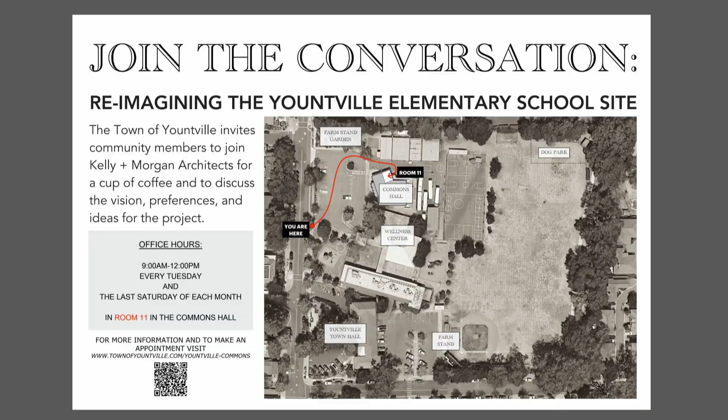So we just talked about joining the conversation. All of you are aware of how widespread the need is, and we've heard from a ton of residents about the number of jobs in Yountville. We've talked about the mismatch of housing stock, and the multifamily zoning, even though it's a little skewed with things like the Veterans Home. Yountville looks good on paper, but outside of Hopper Creek and a few other smaller condo projects, it's actually entirely a community of single-family homes.

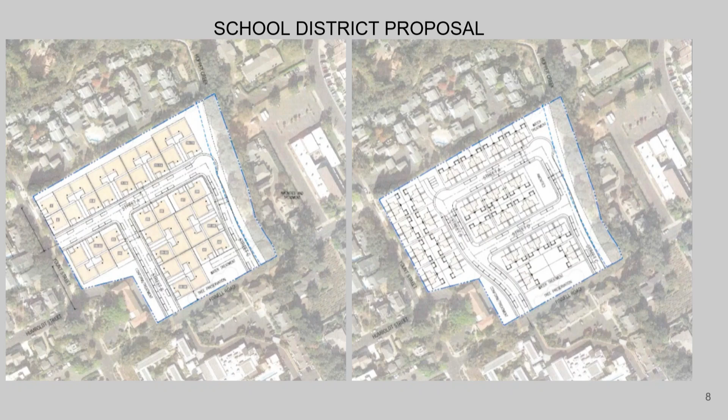We're going to get into this, because the single-family home proposal from the school district, which was the basis for the purchase price, is actually not going to solve the RHNA numbers or create a center in the center of Yountville. It would have been great for a developer, but the highest and best use doesn't actually qualify for the town's general plan or the housing element for single family.

This is the center of town. It's a 5-minute walk to Ranch Market for a quart of milk. It's a very rare thing in towns, even from Calistoga all the way to American Canyon, certainly throughout California.

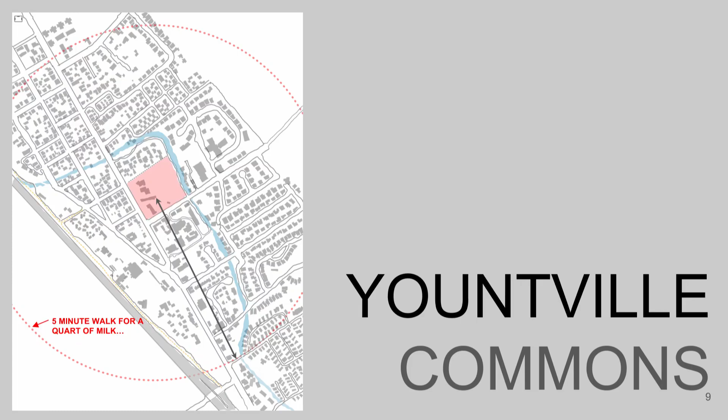Many successful things are already in place in Yountville. There are already established, approved policies in the current housing element, and that's in your staff report. The RHNA number, 72, is now fairly well advertised between very low and above moderate income.

This is supposed to be housing for people who work in Yountville and can't afford to live in Yountville, although many of them are commuting 30 minutes to an hour, usually alone in a car. We don't know if it's for all of them, but it's definitely enough for a high percentage who would rather live here than somewhere else.

We went through a lot of different visual things early on in the project.

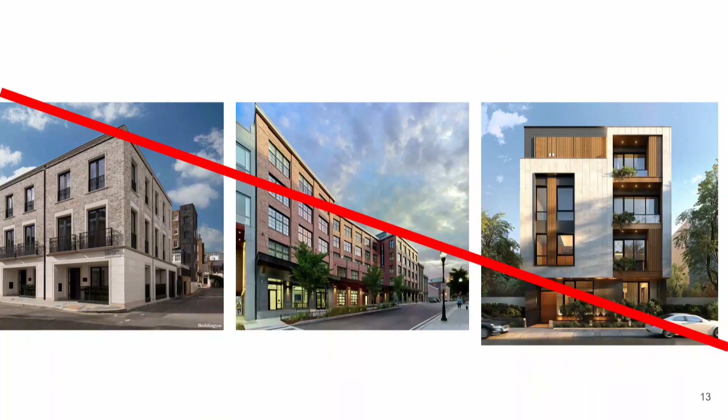These did not, even though they're handsome buildings—everybody's expecting at the center of Yountville more Yountville, and this would look very strange there. We've looked at Old Town densities, and at the other end of the spectrum, the trailer park, like Rancho.

And even though those are a wide range, we're going to have to do even more high density to preserve open space and parkland and still get some of the numbers that people are expecting. So what does that look like?

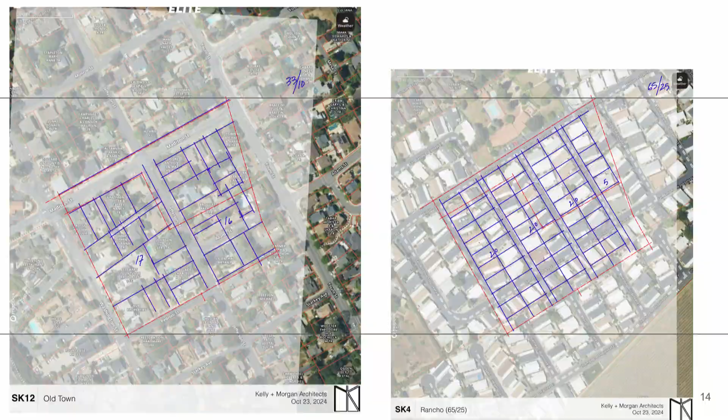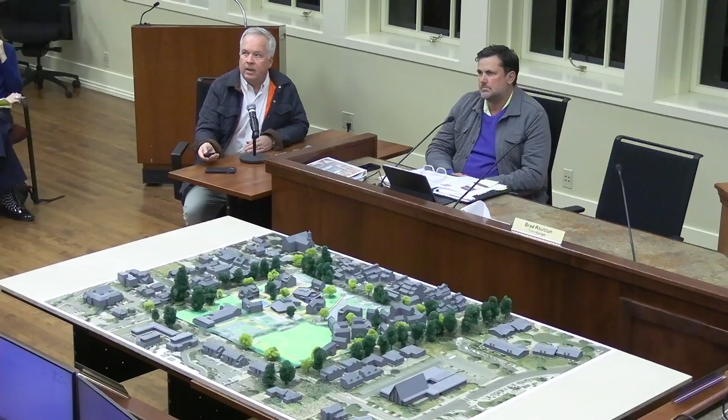We did not show you this last September. We did this actually as a result of that meeting because we needed a little more context of all the parks and recreational opportunities, because they can't all be provided on this site with all the other things being required. You're commissioners on the Parks and Rec Advisory Committee, so you don't need any explanations from me about what you have here, but this was a tool for us to go to the public and other people who ask, hey, how can you fit this?

We were saying the town of Yountville has a beautiful baseball field across the way. They have a beautiful museum. They actually have a beautiful community hall. There's a beautiful pickleball court. There's a beautiful playground. So this helped us both in listing it and graphically showing where the bike paths were, and especially the walking paths near the Hopper Creek, which is such a part of being a resident in Yountville.

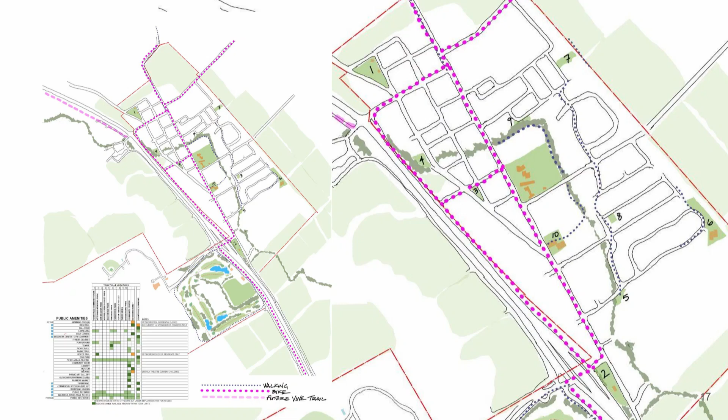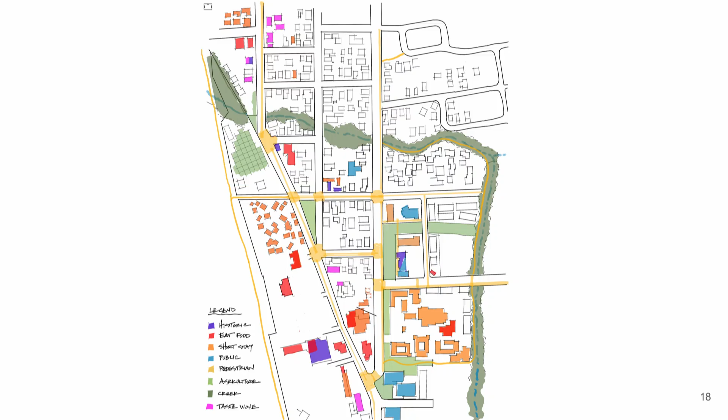And we also described how people, residents and visitors, could both come to this site and leave this site on foot or on bike, and understand where the commercial aspects of the site are, not just next to Bardessono, but all the way up Washington. This is a diagram, again, in your report that shows that. It's a way for us to tell other people when someone says, hey, there's nothing near my house, and we can show them in a larger context. Those are just tools that we're using.

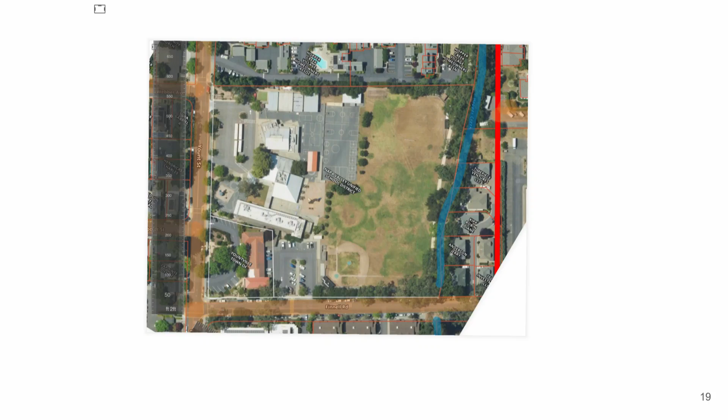So there's the site, and there's a lot of memory, of course. I think tonight we did this sketch that shows right now, without anything changing, there's a little over 3 acres of what I would call open space, recreational space, green lawns - things where it rains and it actually goes into dirt and not onto asphalt or roofs. And that's an important number, I think, for all of us to remember when someone will say, well, you took away this and you took away that and you added that.

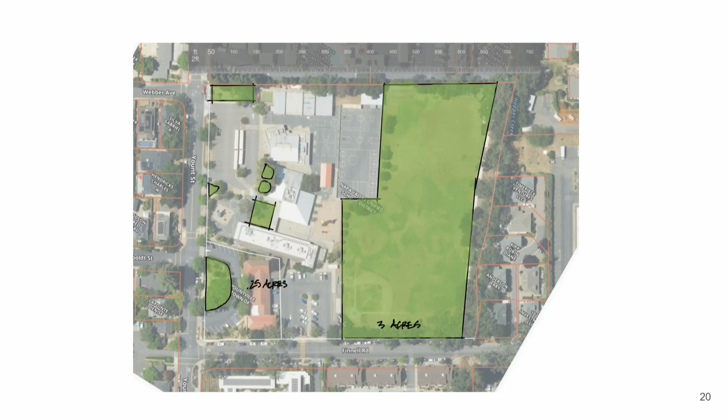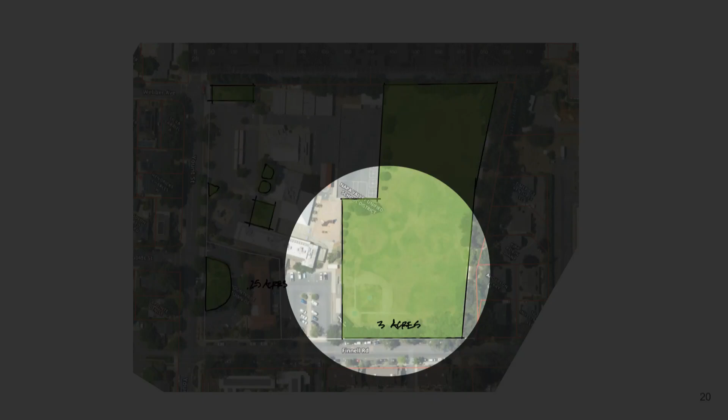And I think there's a baseline in terms of memory. One of the things that we found was, even though it's a recreational space, there's actually not that much connection to the public streets of Yountville the way it's laid out right now. It's perfectly laid out for a school, of course, but not for something that's more integrated into town. So we have to start cutting this up. It's bound by a condominium and by the actual Hopper Creek. So it's not like a city block, and we have to make it more like a city block in terms of parking and other things, and still think about the open spaces that we can build and retain.

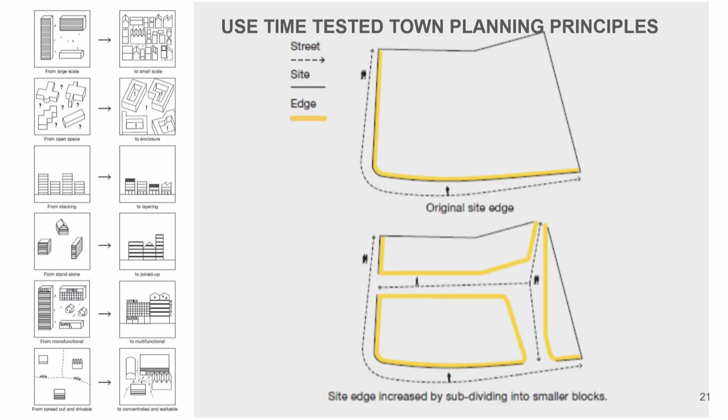And we'll get into that very quickly here. We went through with the town council, ZDRB, Measure S, all kinds of different ways. There's not some secret plan that got rolled out just in time. We went through and moved a lot of the open spaces, whether they're play fields or greens. We can look at things in a plan. There's nothing on this project that's changing the views down Finnell or down Yount Street in terms of the typical Yountville feeling of walking or biking or driving down streets with the tree cover and sun-dappled surfaces.

We ask at different meetings, Sunday dinners and different team meetings, what do you see, what do you not see? That is a question to you also tonight.

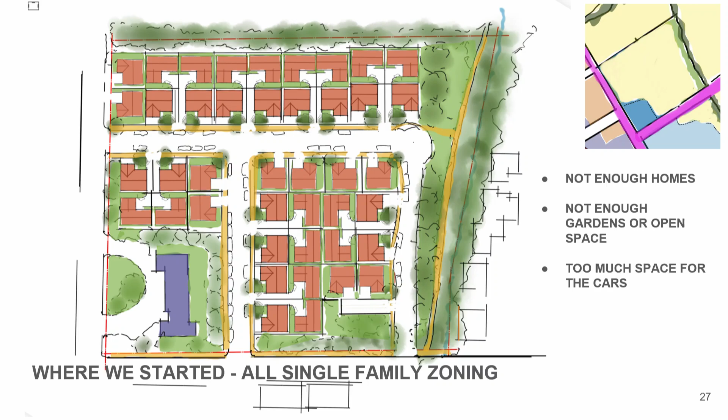This is, of course, where things started. It's technically what started it all. This is the 42 or 48 single-family homes. The reason we keep showing this is to remind the town what instead is happening, because we still have to do at least this number of units, if not more, plus the recreational space, plus the public buildings, plus all the other things. Just as a reminder, that's barely a half acre of open space compared to the three acres right there. So this was never viable, and it's important to keep reminding the town over and over again what was an option and what the town did to take a fork in the road.

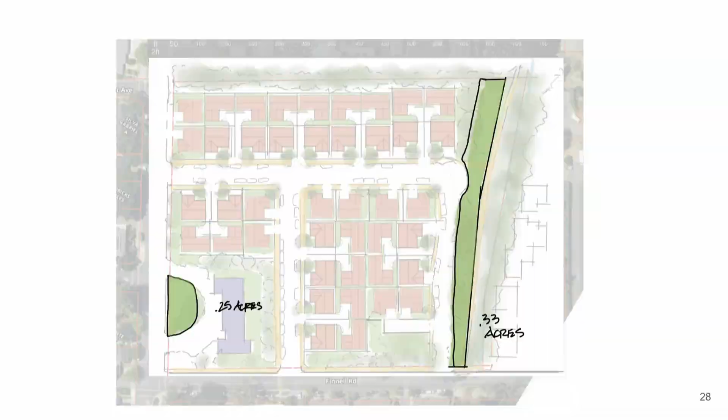And it's not just about housing, but about these open spaces and how they're integrated. So that's the scheme. You can see this scheme in this model right in front of you tonight. You're seeing a lot of open space and a lot of housing. This is at least the 75 or 72 that the RHNA number includes, plus the new fitness center.

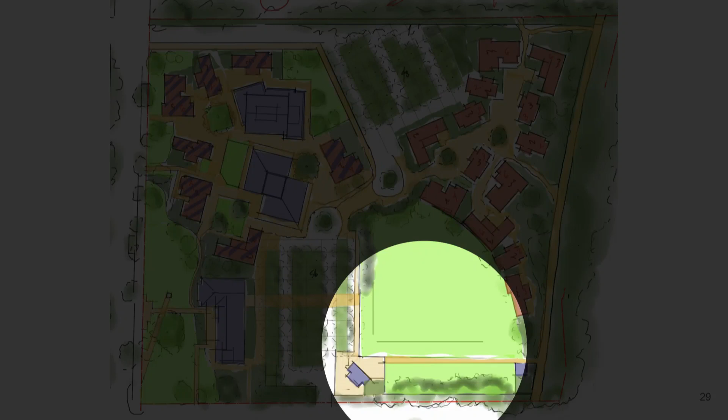The historic grammar school building that we're in, the Don and Sally Schmidt Hall, which was the old multi-purpose room for the school. There's the farm stand, and in these drawings we're also showing the garden up in the left-hand corner, and probably a relocated dog park along Finnell that's closer to the farm stand, closer to parking, and just as accessible for everybody. We've talked to a number of people who love the dog park but would like it closer to where they can park comfortably.

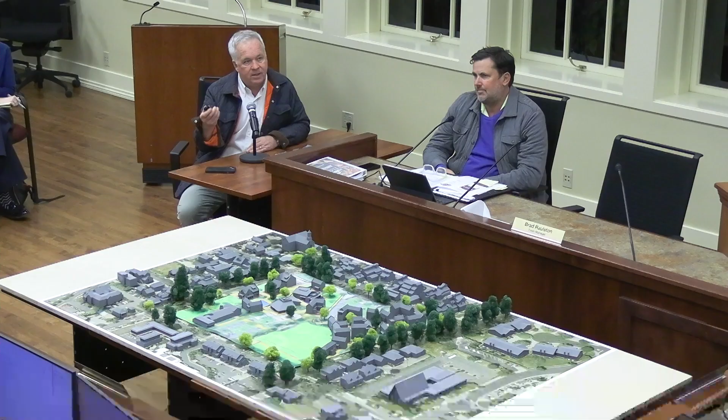And there it is, that's the other diagram, that's just over 3 acres. In this layout, that's the same amount of open space that currently sits in one big rectangle. The reason we drew this is now you're seeing all of the connections not just along Finnell, but all along Yount Street instead of parking in this scheme.

Can I? Walk. It's at the opposite end, but we organized this model so it's aligned to the axis of this building, so everybody can kind of find themselves.

We drew a blue swim workout pool, especially for Commissioner Rick. There's a lot of people who love the idea of pools, and I think it being connected to a fitness organization that could take care of it is a big idea. We show these things not just to sell them, but to make sure everyone understands how it's laid out. This is the community garden that Peter Jacobson just planted in the last few months.

This is, I can do this in two hands: this is the dog park along here on the south side of the current baseball field, the farm stand incorporated into an activity like that. But one of the biggest things for this scheme is all of the parking that's in front of the grammar school, in front of the town hall, in front of all of these former school buildings, is now behind.

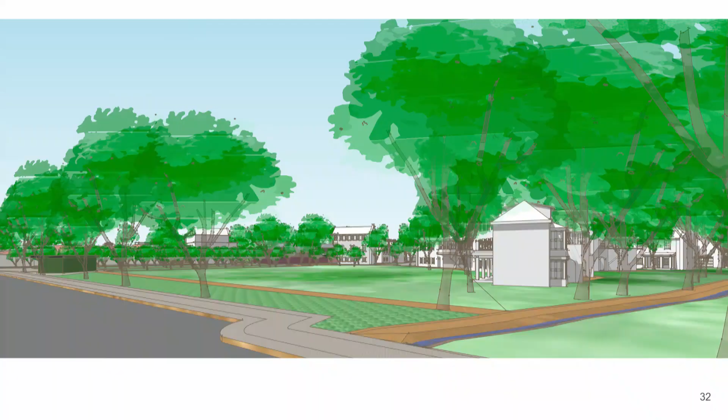So that's the model. You can see some of these street level or eye level schemes. That's the farm stand, of course, there on the left. And we're going to show tonight there is a phased program.

Many residents have talked to us about how it's important to leave more room. If you plan for success, you have to be able to say, hey, this is so successful, we need to be able to add another 20 or 30%. So we actually have a scheme that we'll show you that fits in that ball field section right there.

This is the second scheme. We're not going to build it out tonight just because of the time and the complication of taking one model off or one model on. But the point we're trying to make is that both schemes we're showing have the same acres. The 3 acres of open space is kind of our touchstone.

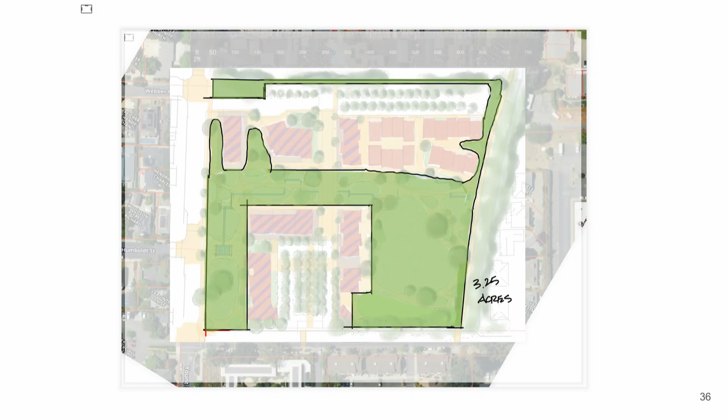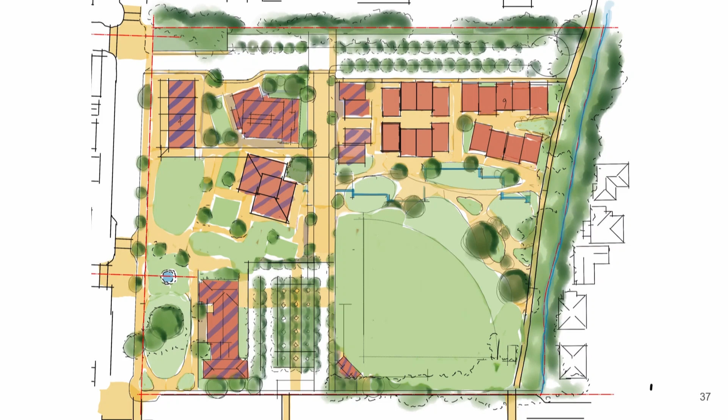And it can be organized in different ways. This is the one with the library still there. A lot of the alternatives we're bringing to the town council are a result of many meetings where everybody wants alternatives. They don't want just one solution that people are chasing. They want to have a lot of flexibility and adaptability around the school site, whether it's Parks and Rec, housing, or the other civic pieces.

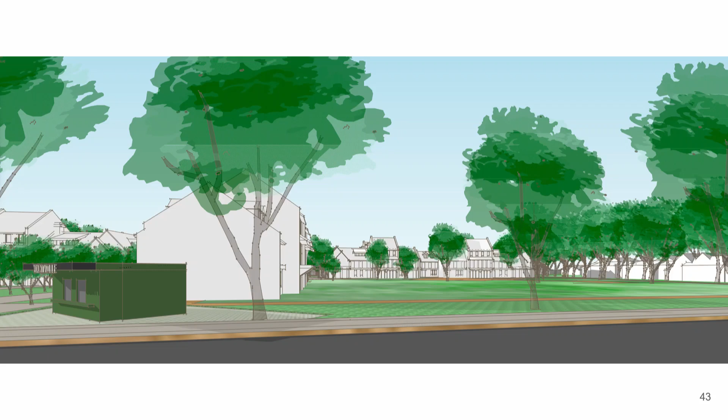There's a picture of the ball field. The ball fields being sort of with room for housing on them. Some of the more tighter versions. The second scheme is a little tighter, allowing for larger single parkland or open spaces.

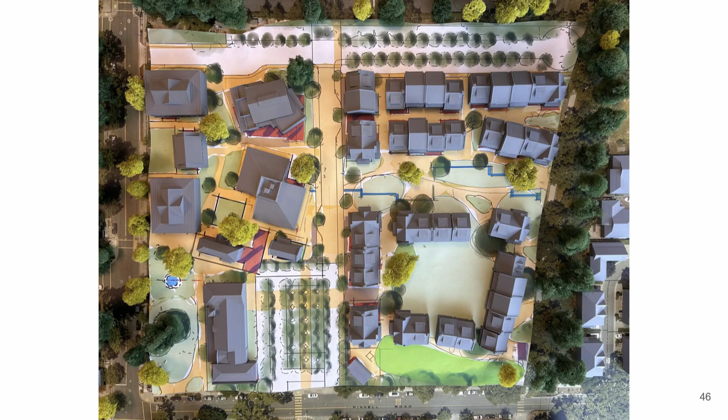That's looking down Yount Street with the town hall on the right. There's town hall, there's the community church at the other end of Yount Street, and that's the picture of the other scheme built out. In both schemes, the built out scheme is probably 110 units with 110 parking spots, very similar to the Arroyo Grande, 1 parking spot per unit or per bedroom.

You can see this caused some confusion on Sunday, but everybody liked it when they finally saw it. That's really the scheme you're seeing right now laid out on the model. This is with the baseball field filled with housing and a full build out. This is the other village scheme with the ball field open, and this is the other scheme with the entire site filled with 110, 115 units. And that's it.

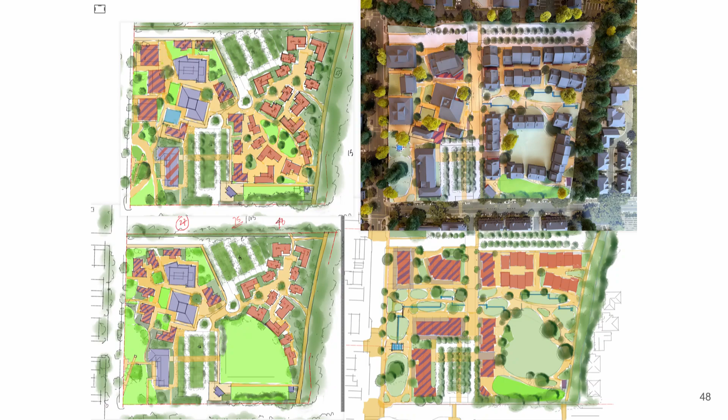Okay, I want to add a couple little things, and then obviously we can answer any clarifying questions. The staff report asks you to focus on the baseball field, Parks and Rec elements, and then finally consistency with the master plan and any other long-term plans.

I think a couple things I would add that are important to think about, because I've heard since I got to town this idea of what I started calling civic storefronts, but we've also referred to it in the general plan as resident serving retail. It's a big discussion of the things we used to have and what happened to them. And the cobbler, I joke about the blacksmith and the cobbler as kind of old school things, but one of it was the gym, right?

I think we've at least solved that short-term problem. But there are issues where residents need things. I think at least recreationally we have more than we need, but from a retail or civic standpoint, the plan on the top left shows buildings denser than what's on the model, with the idea of an arcade at the lower level, integrating civic storefronts. I just want to say that out loud so we're thinking about it.

The other thing about open space, what's not shown when he filters back the acreage, is the parking lots. We've talked about this opportunity - you coined the term parking orchard at one point. The point is, you can have permeable surfaces, parking lots designed with bike paths and pedestrian paths going through them. I point to that little arbor path from the marketplace over to Villaggio - that's beautiful, and you see people using it all the time to walk their dogs. So even though the parking lot isn't technically open space, if we're smart about design, it can be part of that fabric too.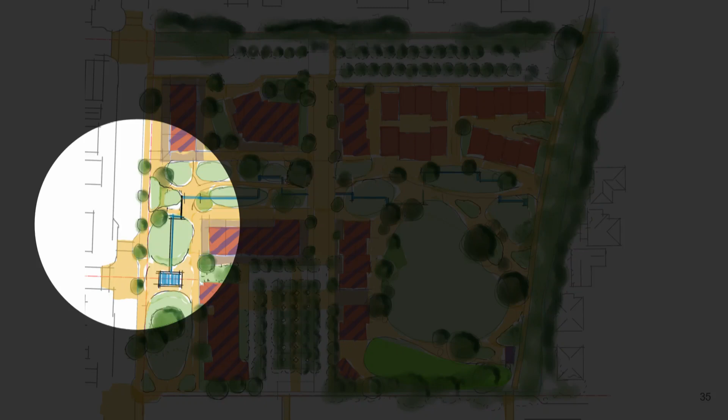Now, a play field like that doesn't have a pathway through it, but it's also not a forest of trees. Something like this in front of the town hall, the historic grammar school, would have a lot of greenery, maybe lawn and maybe more something functional. But everything in these schemes has a way to get around. There's no gardens, there's no scheme around this thing that would ever be mistaken as an arboretum or some reinvention of a wild land. Does that help?

Yeah, I'll add just the term Woonerf, which I had to get in there somewhere tonight. I don't know if you'd heard it before when I introduced it, and I think one important thing when you talk about access is truly fire access, and I think it's an important part of the conversation, also when you're moving into your house and things like that. So again, when you go to Europe it's different, but now we have codes that say you've got to have 14 feet or 18 feet or what have you. But those access roads can be Woonerfs, which is the Dutch term -- in essence these are multi-purpose roads that prioritize pedestrians. It's really a pedestrian road, but a fire truck can drive on it because you need those things. So that's another piece when you think about open space. The term Woonerf was intended to solve some access problems from a code perspective, but just to provide a really walkable neighborhood.

One of the absolute principles of this project is that the car is a guest on the site. That's a principle from the design. In either one of the two schemes that we're moving forward with, the response that we got from residents -- and they said it in many different ways -- was, I don't want a parking lot, I don't want to see cars, I don't want to walk next to cars, I don't want fast cars going through here, I don't want a new street. And we showed them more pictures of places like this picture, this is a classic Woonerf.

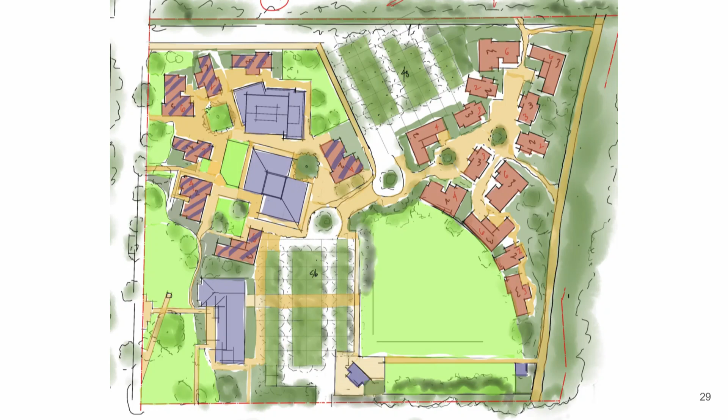Another thought has to do with these parking orchards. My wife Ashley and I were both in the wine business before retiring, and we were always surprised by the people that worked on our bottling lines and their cars—gorgeous, new, and expensive. When I think of parking a gorgeous, expensive car underneath a tree with birds in it, especially a fruit tree with rats and birds, that's not a big success right there. So I'd like you to think a little bit about that.

So those are my general comments about where we are, and then I'm happy, unless there are other comments, to move to discussions about the baseball field.

Anybody? Seeing none—Vince, you mentioned you weren't ready to stand behind a standalone baseball field. Did you have any other thoughts to share on that? Thank you, Mr. Chairman. Only that we have to talk about it, but I don't think it's the highest and best use. That's all I can say.

Yeah, Myrna, what were your thoughts? There's a lot of emotion among some people in our community about the baseball field, but realistically, I don't think we have children who play baseball here. You mentioned at our meeting that there are 30 children under the age of 18 in the town of Yountville, and I'm not sure how many of them are even eligible to play baseball here. As much as I've thought about this, I don't feel we should exclude housing at the cost of having a baseball field.

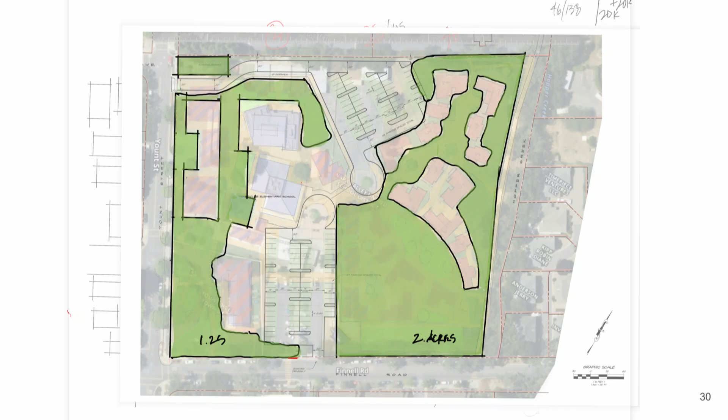So the guidance that we're looking for, that is helpful for us, is that yes, the Little League field is definitely shown as a potential for future housing, but we're actually leaving enough room for the fields. We're not showing two. And we're showing an extensive amount of parkland and town greens, and the elimination of the parking lot.

When everyone starts concentrating on what we're taking away, I want the headline to be that they're taking away all the parking lots on Yount Street, not that they're taking away the Little League field. We're not showing the removal of any Little League field. We're showing the removal of parking from the front of the property, where the school had it, to the middle of the property where residents would need it. Does that make sense?

We're not taking the Little League field away. That's definitely a potential down the road for multi-phasing. What we're doing is taking a lot of the concrete and asphalt off the major street, the identity certainly in front of Town Hall, but putting the parking where it needs to be. With the Woonerf, someone can conveniently walk and get groceries in and out, and little kids can bike back and forth across the parcel without parents worrying about them being run over.

I actually do have a question. What do you envision that former parking lot in front of Town Hall to look like?

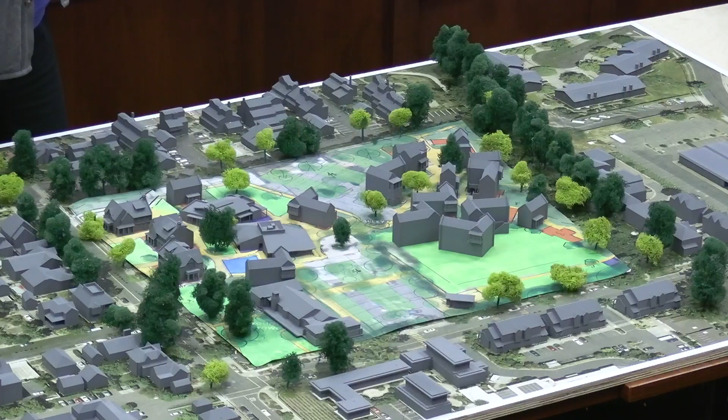What I call the hourglass, which is where I really liked this idea of this hourglass shape. And so if you move back, let's get rid of that building, let's get rid of this building, all of a sudden this gets a little softer. But then as you walk through the site, from both parking lots, you can get to the center, and you can go through the center as a beautiful thing. This hourglass means you can go to each corner of the site without walking through a parking lot. And I think if you start being able to move some of the density here, it frees that up so that these edges and this center, it just gives you a lot more space, right?

So that the owners and all those things don't feel constricted. I think ultimately it'll just be a much better project, and you'll get whatever the unit count is, 100 units, 72 units, whatever we decide. You've got a lot of space to play with on the edges if you integrate the ball field for the housing. Fair? Yeah.

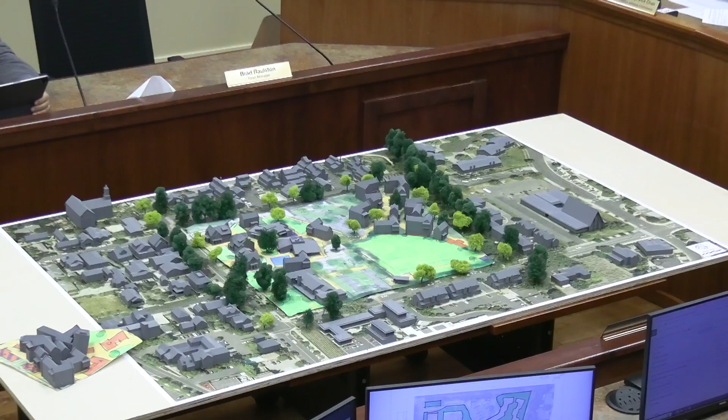Okay, did anyone have any other comments on the Parks and Rec elements in the presented comments? I want to call everyone's attention to the Town of Yountville Public Amenities and Locations diagram. I think that's very helpful to look at what amenities we have and what is potentially unique to the Commons, and going down that list, unique is the wellness center, the dog park, the farm stand, and the farm stand garden. But there are also lawn area, fitness classes, playground, that sort of thing. So I think unless anyone has specific concerns or comments about things unique to the Commons site, I think we can say that the table pretty well summarizes it.

Just, if I may. Please. So I did want to piggyback on Commissioner David's comment. There's something inviting about recognizing the history. So you'll have new residents there that aren't from the town, and if the town is able to put its mark in the center, like you mentioned, or some version of that, then that would be pretty helpful to what your comment was earlier. What really is the accessibility? Because I remember what was a little off-putting for me was, and I think it was you, Mr. Chairman, a ball field is a beautiful thing, and it's a beautiful design, and I love them. But there's something about it that just says stay off, right? So I liked your comment, and I just wanted to make sure I mentioned that.

One thing I wanted to mention, Myrna, is that we did get direction on the Legacy Trail, and I do think there's already a plaque for Dick Kaneshiro. Clearly, if the farm stand is working well, which I anticipate this is going to be a success, there's an opportunity to pay homage to him and his family, not only through the snack shack, but I could see the dog park easily keeping home plate, and having some homage that we could talk about for the field, so that people understand, just like what we did with the memory wall with the kids' handprints. Those things are important, right? And I think we can definitely integrate that. So as the Legacy Trail evolves, I'll make a note that Dick Kaneshiro is something that should be recognized.

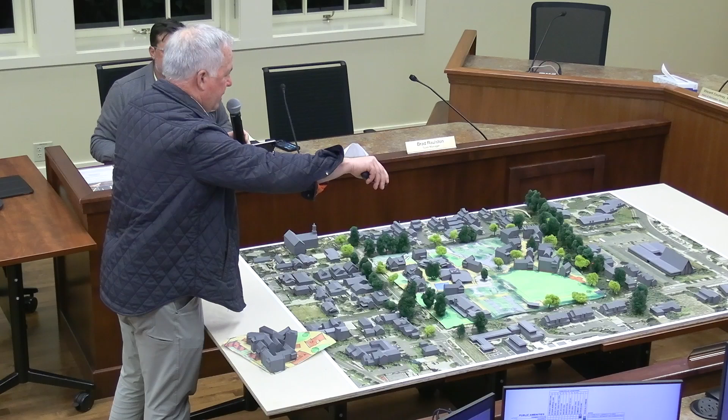This is a brand new physical space in Yountville that's never been there. And these are existing buildings, but by being able to enclose this and complete the tree line here, and a public space like the dog park and the farm stand, that's a brand new recreational space. And that could be just a place where soccer practice happens, and lacrosse practice, and maybe some baseball hits, and things like that. All of it very functional, just as functional as this little outdoor room or whatever happens over here.

So we're trying to put as many alternative outdoor rooms that can be connected by residents, maybe some that don't even live here on the Commons, and have lived here for a long time, that all of a sudden everyone here has. We've talked to a few of those. They're very used to some of these open views around here, and the ability to maybe keep them and enhance them with some of the more amenities is also something we're trying to add to. I know it's scary to lose things like views, but if we can enhance views, and especially some of the quiet things against Hopper Creek, that's what we're trying to add. We're not trying to just protect things. We're trying to actually add real spaces that have never actually happened in Yountville.

All right, so we've talked about the baseball field, we've talked about the Parks and Rec elements in the presented concepts, and then consistency with the Parks and Recreation Master Plan and the general plan as it relates to parks and open space.